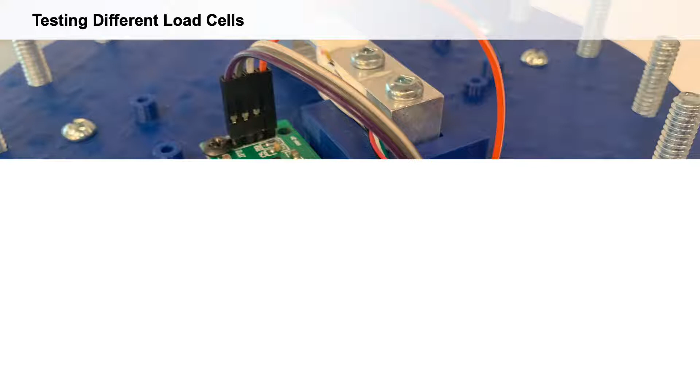Next, we tested different load cells, and we wanted to make the table capable of handling any possible encounters, particularly in relation to the weight placed on it. We explored lower capacity load cells until we found a weight range that met the requirements of foreseeable everyday encounters. In the end, we calibrated the load cell to a maximum of 5 kilograms, which was more adaptable for deformTable, as most daily items were less than 1 kilogram.

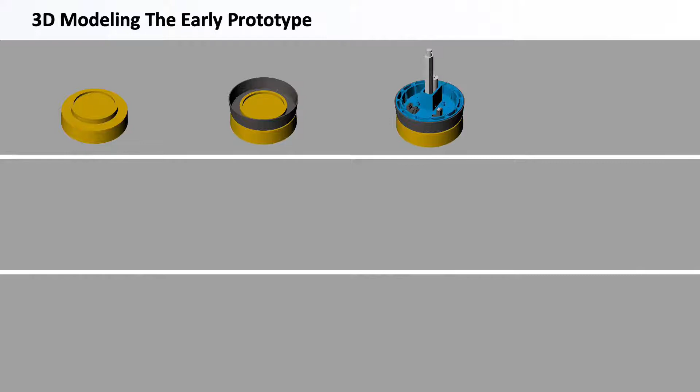Having explored computation, actuation, and form separately, we needed to bring these together into a single functioning form. Thus we modeled an early prototype. The main challenge was how to design a structure that could be assembled to upholster the fabric cover, so we designed a dismountable physical form to solve the problem.

First, we upholstered the fabric around the surface, then screw-connected the fabric form to the wooden base and the actuator of deformTable. Lastly, we screwed the connections on the dismountable structure.

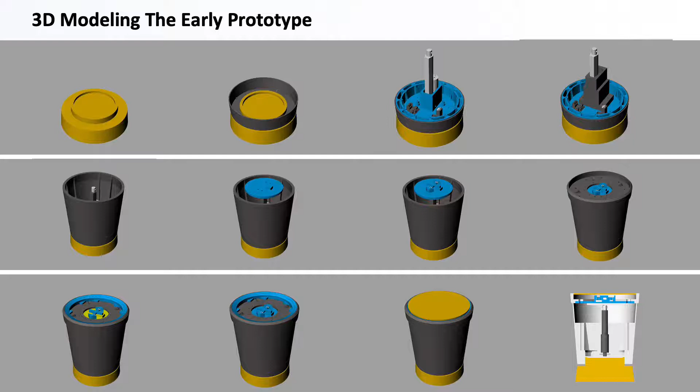We rendered the form of the prototype to speculate on compositions of different materials.

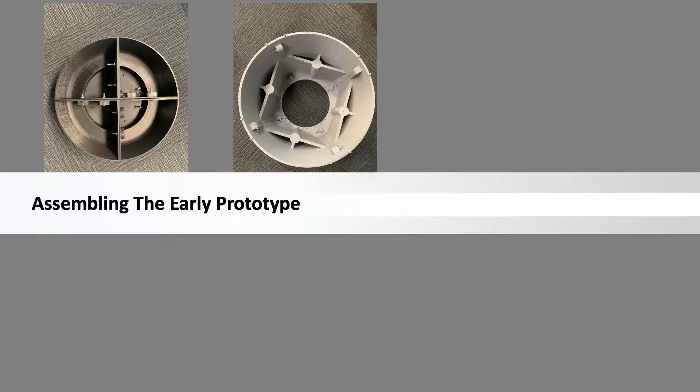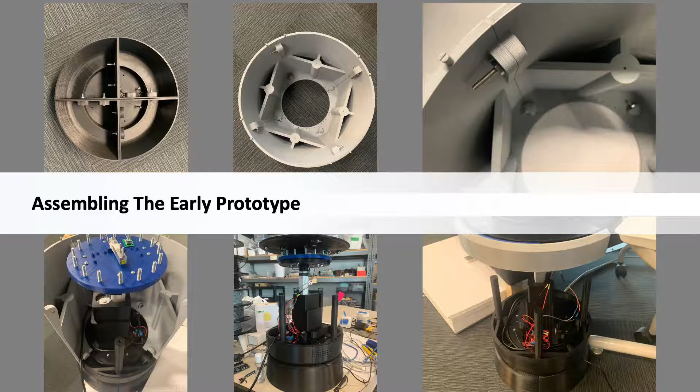After we had the initial model, we decided to print all the parts out for testing. Many issues arose out of crafting the assembled form rather than planning it ahead of time. For example, we found out our 3D printer could not print digital parts that exceeded specific dimensions, and this created a need for remodeling large parts into several smaller components.

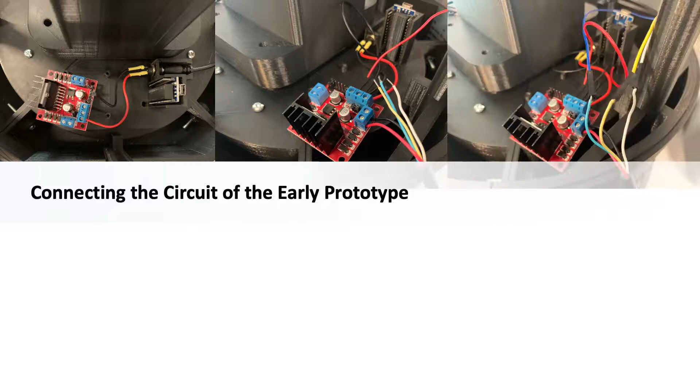We connected all the circuitry of the early prototype. Specifically, we connected the motor driver and the load cell to, and programmed, the Arduino Nano board.

Informed by former design explorations of slow technology and material speculations, we tested the early prototype of deformTable by living with it and experiencing it in our daily environments. We wanted to derive first-hand insights that could help us refine the deformability and materiality of deformTable.

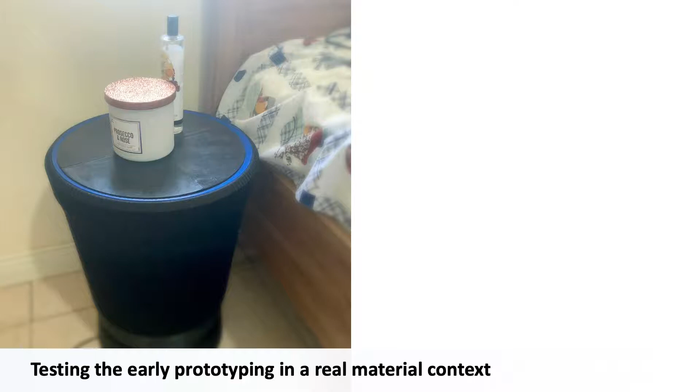Our early prototype had black fabric, which we discovered made it difficult to perceive the nuanced changes on its surface. The early prototype was also solid, making it difficult to play with the inherently soft, dynamic shape changes. We also found that the early table was not stable when we placed large pieces on top of it.

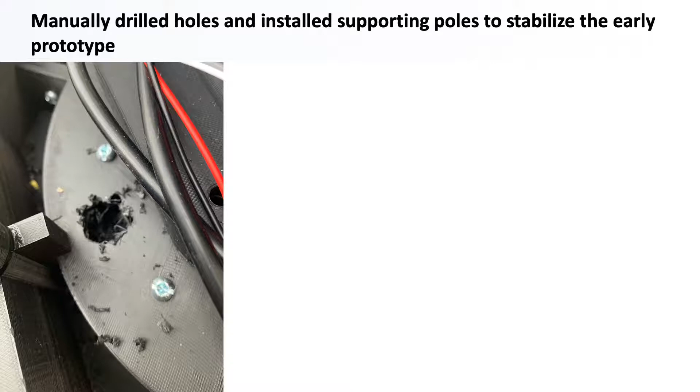To address this problem, we mounted three supporting poles to stabilize deformTable by manually drilling holes into the base of the early prototype.

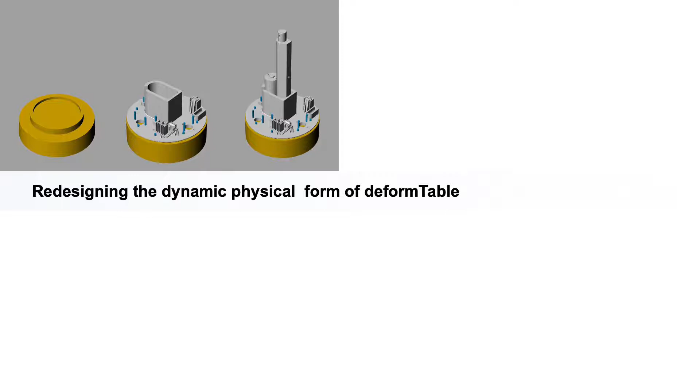Accordingly, we redesigned the physical form to enhance the potential for creative appropriations. We purposefully designed a hollow space between the elastic fabric and the material form, which added an open-ended quality, leveraging the nature of the fabric to cultivate new and unknown appropriations over time.

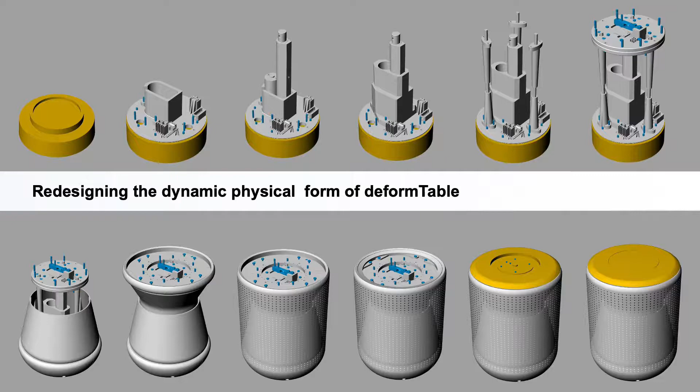Assembling and refining the form also called for a level of experimentation and judgment to create a robust artifact that could fit different households. We translated this in part into designing deformTable such that it was both a computational and non-computational artifact.

The aim of fabricating wooden parts was to enhance the simplicity of deformTable. We decided to use solid wood to produce the top surface and base of deformTable, while keeping other parts as white-colored plastic.

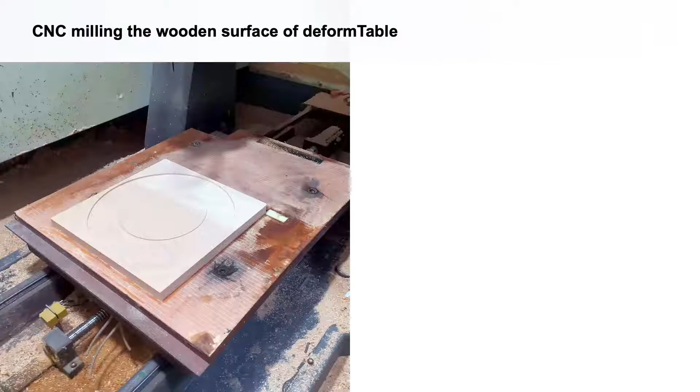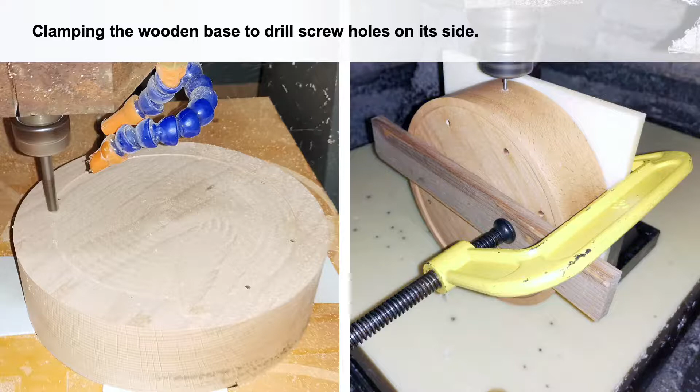After sending the 3D model to a factory, the technician fabricated the top surface of deformTable and also clamped the wooden base to drill screw holes on its side.

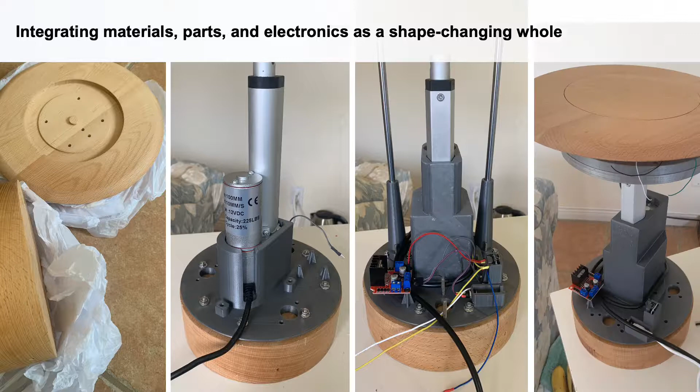We 3D printed all the plastic parts and CNC milled the wooden parts simultaneously. We also assembled the materials and electronic parts into a set of shape-changing research products.

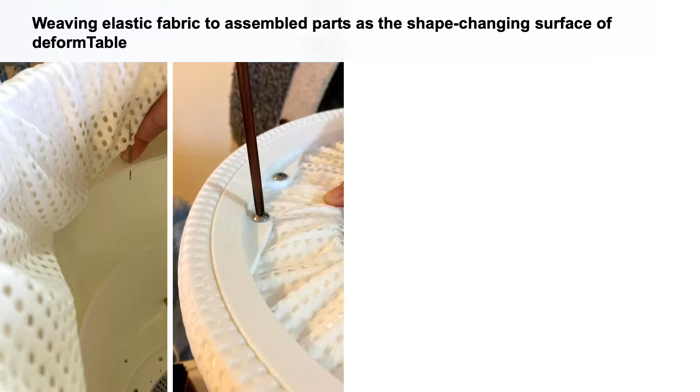In this final assembly, we encountered a remaining challenge of how to smoothly upholster the elastic fabric onto the hollow structure without any wrinkles or unwanted draping. We found that we needed to fabricate additional parts to assemble the fabric onto its mountable structure in a consolidated fashion with the rest of the structure.

Ultimately, we produced five sets of deformTable devices that we believe support creative appropriations in everyday settings over time. We deployed five sets of deformTable to five independent homes over five months in Metro Vancouver, Canada.